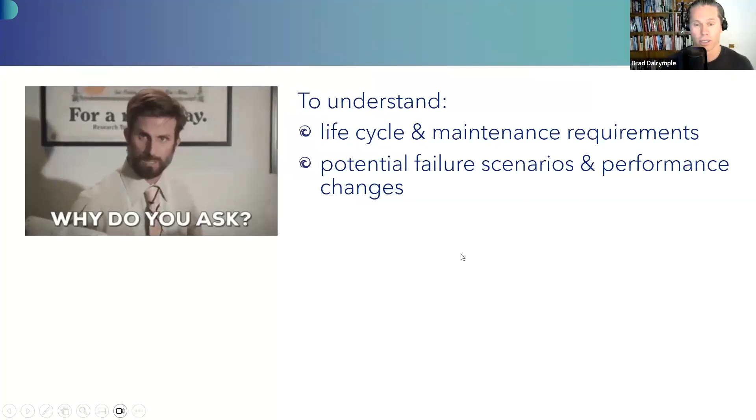Also, it's worthwhile noting that a huge amount of money is being spent on them. So like with any sort of expenditure, whether it's a car or a house or any sort of infrastructure, you really want to know how long they last. And to give you an example, this is a statistic from Healthy Land and Water. Just in Queensland alone, they reckon around $3 billion worth of bioretention systems are going to be put in over a 30-year period. And that's $100 million a year just in bioretention systems.

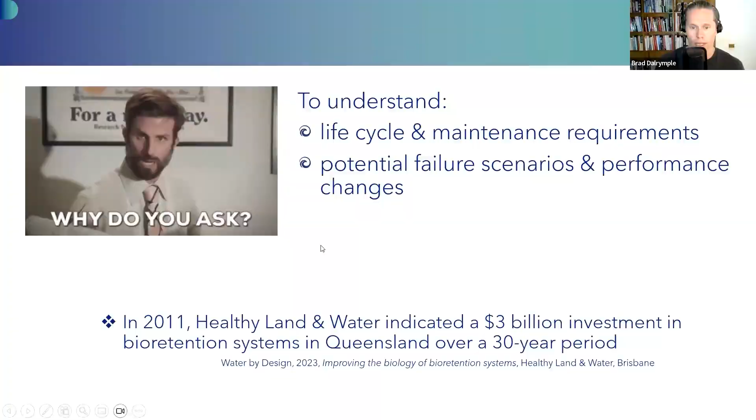So I think it's a pretty important question to know. And again, that's just in Queensland. I suspect it's more in Western Sydney and certainly in other parts of the country as well. So yeah, we're spending a lot of money on these assets. We should know how long they last. And like we often say, unless you've got data, you're just someone with an opinion. But a lot of people have opinions in this matter, and a lot of those opinions aren't based on much.

So to give you an idea of opinions, I've obviously got the live poll happening, and I can see over 100 have already answered the question. Really interesting results. So if you haven't already done so, please complete that poll survey question.

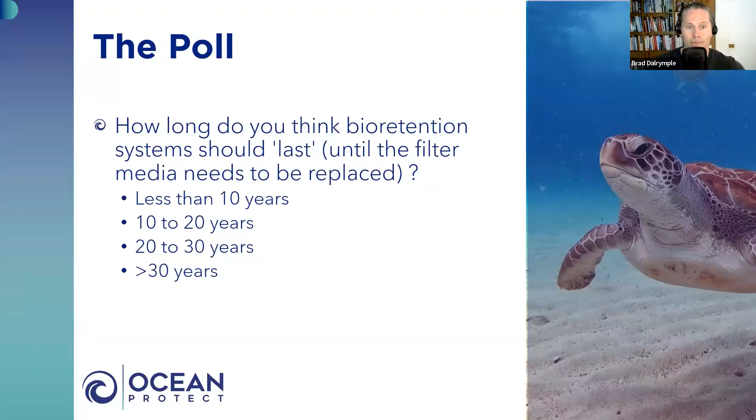We make sandy loam media for conventional bioretention systems as well. But also we make alternatives to bioretention systems. A lot of people would be familiar with our cartridge systems, for example. So long story short, I've got a conflict of interest on both sides of the fence. But to mitigate that, at least in part, anytime I refer to a study or a document in this talk, I'll provide the full reference.

Yeah, sorry, Brian's got a question. Thank you, Brian. He says the poll question says should. Does it mean how long we want the system to last or how long we think they currently last? It's how long you think they will last. So just to clarify, it's not a question of how long they should last, it's how long you think that they will last.

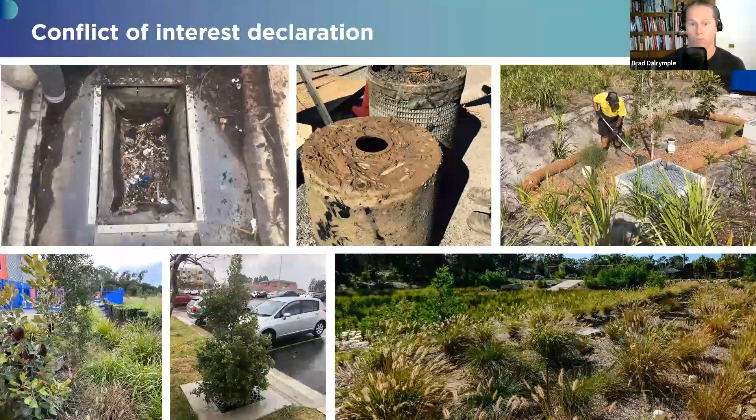So the question is, I'm just reading it now: how long do you think bioretention systems should last? As in, if it's appropriately put in the ground, for example. Okay. Hope that helps, Brian. Thanks for the questions. Keep them coming.

On that note, I'm going to share the poll results. So I'll give people 5 more seconds to put in your answer. I can see there's already 108 answers. Going once, going twice, going 3 times. I'm going to end the poll, and hopefully you guys can see the poll results. So I'm looking at the answers now.

I'm not sure what you can see, but out of 109 submissions, 34% have said less than 10 years. 37% have said between 10 to 20 years. So roughly 71% have said less than 20 years. 14% have said 20 to 30, and 16% have said over 30 years. So yeah, interesting results so far.

So I'll let you guys digest that for a sec. So 34% have said less than 10 years, 37 between 10 to 20. So like I said, 71% have said less than 20 years. And 29% have said more than 20 years. Interesting. I'm going to stop sharing now.

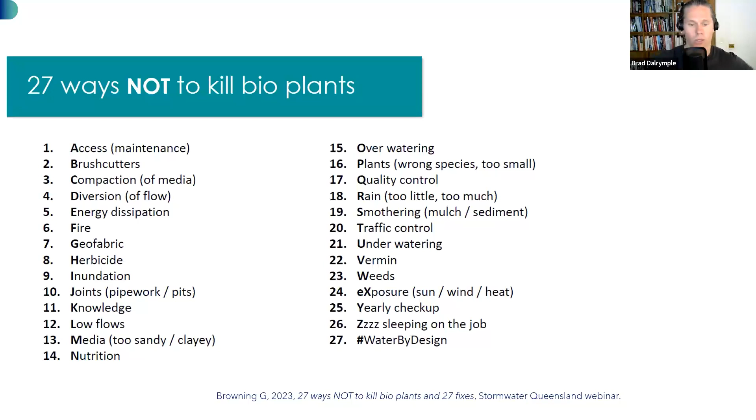But probably the two most common reasons that I see cited in guidelines or other documents are these two key reasons for failure. Number one, hydraulic conductivity, i.e. the system just doesn't drain very well at all. You get a whole bunch of ponding water, water doesn't drain through the filter media, so subsequently a whole bunch of water bypasses and doesn't get appropriate treatment.

The second reason commonly cited, probably the more common one, is that after a while the system just stops removing pollution very well. Basically the system is like a sponge. After a while that sponge reaches its capacity for absorbing pollution and physically can't remove any more. So they're probably the two most common reasons that I see claimed, and the two main ones I'm going to focus on in my review.

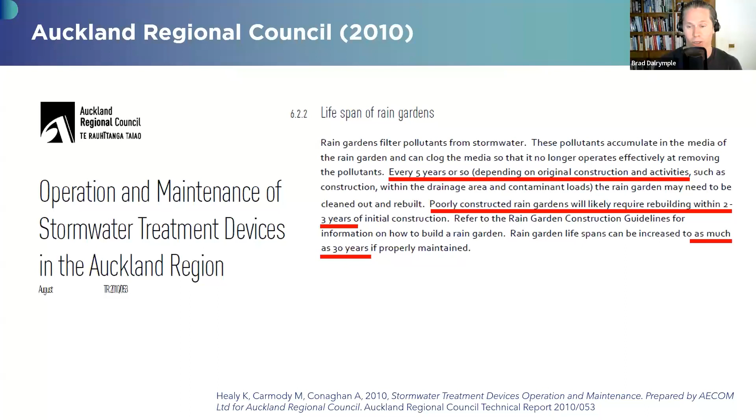Let's move on to what would be considered in many parts of the industry the Bible of water-sensitive urban design, how to model stuff in MUSIC. This is the eWater MUSIC manual, and they say basically every 25 years you probably need to replace the filter media.

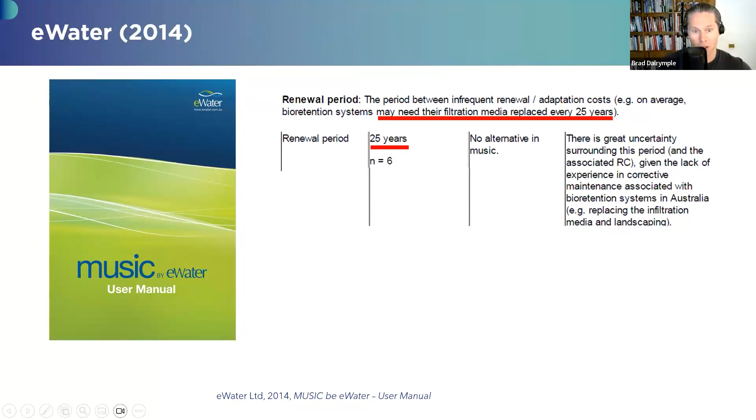But then they also say there is great, great uncertainty surrounding this period. That is true. But moving on, Melbourne Water. This is a leading authority in Victoria. They reckon, provided it is appropriately maintained, they should last at least 20 years.

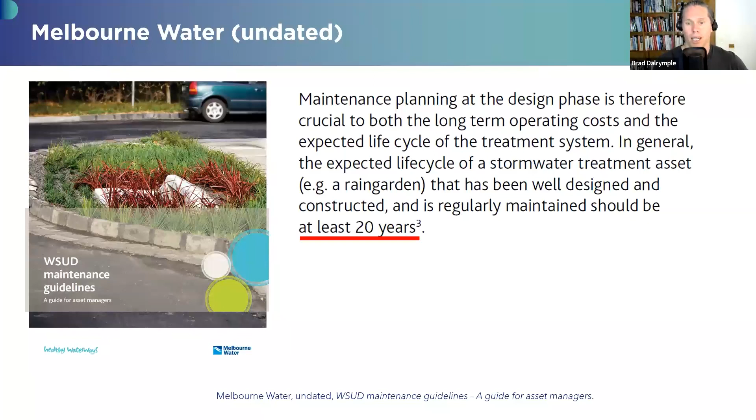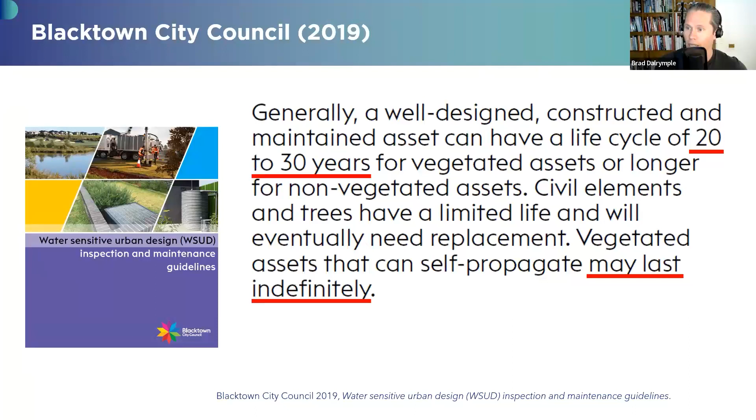If I go to Blacktown City Council, I know there's a fair few Blacktown City Council staff dialing in today. This is straight out of their inspection and maintenance guidelines for WSUD assets. They say, and they're talking about vegetated assets, but that obviously applies to bioretention, it could last around 20 to 30 years if it's properly managed, but also could potentially last indefinitely, similar to what Tom was saying before.

This is another paper out of the States. This is in relation to Filterra bioretention systems, which is a high-flow bioretention system, which I'll talk to in a sec. But they basically say, similar to Tom's claim, provided appropriate maintenance is performed, the systems should theoretically last indefinitely. And again, you can see I'm providing full references for these documents at the bottom of each of these pages as well. And the slides will be available on the website, so you can do your own research as well after today.

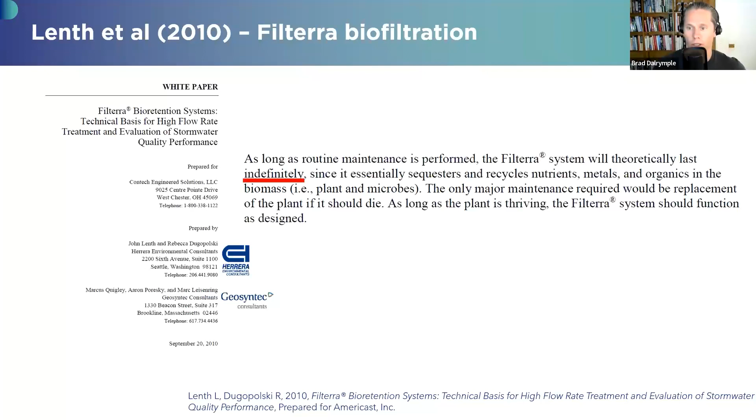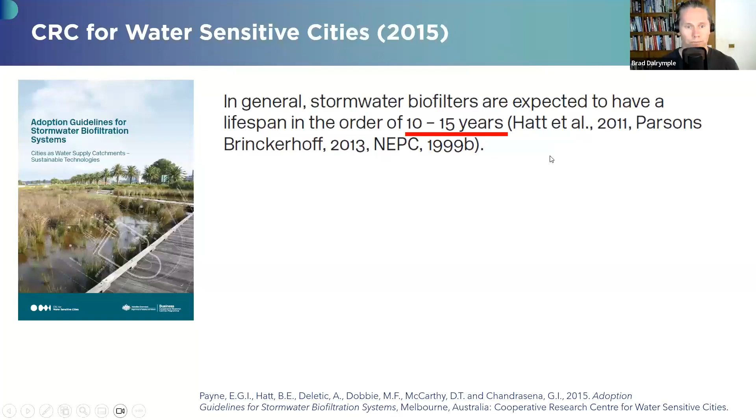Probably a really key document that is widely used across Australia is the CRC for Water Sensitive Cities adoption guidelines for stormwater biofiltration systems. They say, in general, bioretention systems should be expected to last about 10 to 15 years. Now, one thing that I will give credit to here is that they at least provide a reference. This is a Belinda Hatt study from 2011, amongst other documents, and I'm going to refer to that very shortly as well. So key documents basically saying 10 to 15 years.

Most of the studies that we have seen in the literature are basically using column studies, like laboratory-based studies, or focusing performance testing on quite recently constructed bioretention systems, like less than 3 years old. So it's a real unknown as to whether that's actually appropriate in terms of assessing bioretention longevity. But despite this claim, I took it on board and tried to dig up as much research as I possibly could. And that basically sent me in all different directions, including lab studies and real-world studies across the planet.

So first up, I mentioned that Belinda Hatt study before from 2011. And this is what the CRC for Water Sensitive Cities guidelines refers to in relation to that general statement that they should last 10 to 15 years. That is based on this study. And the study is available online. They did show quick breakthrough of zinc, which is a heavy metal that's quite hard to absorb, at least long term, because it's probably one of the first heavy metals to break through, i.e., go through the system.

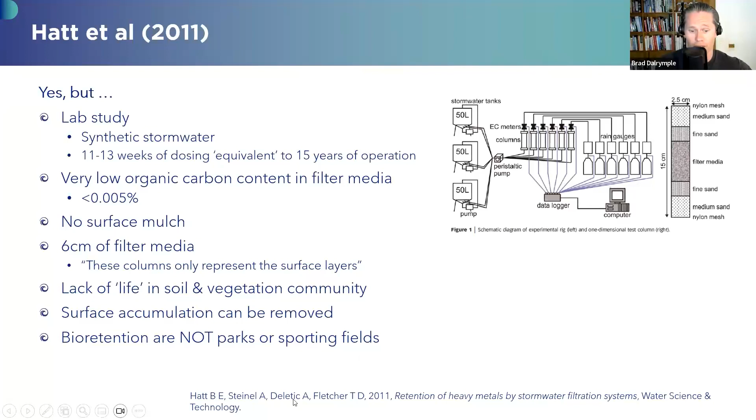I'm going to look at a few other lab studies, recognizing their limitations. This is a study out of the Canadian Journal of Civil Engineering. They looked at synthetic stormwater as well, equivalent to 20 years operation, 8 columns, decent depth and vegetation. And what they showed was that effluent concentrations of pollutants actually decreased across the monitoring period. So basically, as the systems got older, the effluent concentrations decreased over time, which means the system is working better as it ages.

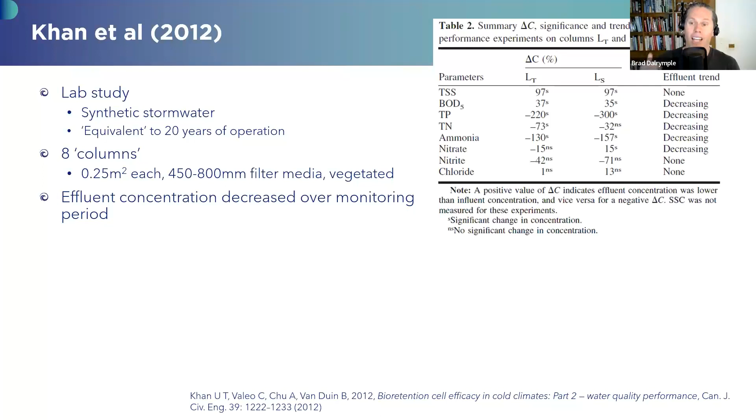Having said that, this study is very upfront in stating that there's a big limitation to this study or any lab study, and they say it here: the application of a large volume of runoff over a relatively short period of time does not mimic actual long-term operation, especially the intermittent nature of rainfall events. It can be considered a worst-case scenario. So they're saying that this sort of study, synthetic stormwater dosing over a very short period of time, as per the Hatt study, is basically a worst-case scenario.

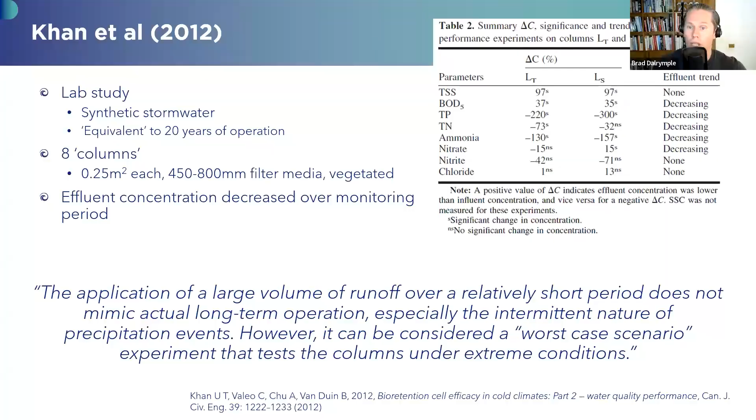So it's worthwhile noting that these lab studies have very limited use. They're interesting and can provide some indication of lifespan, but you really need to look at where the rubber hits the road in terms of real world performance studies. And that's what I'm going to talk about now.

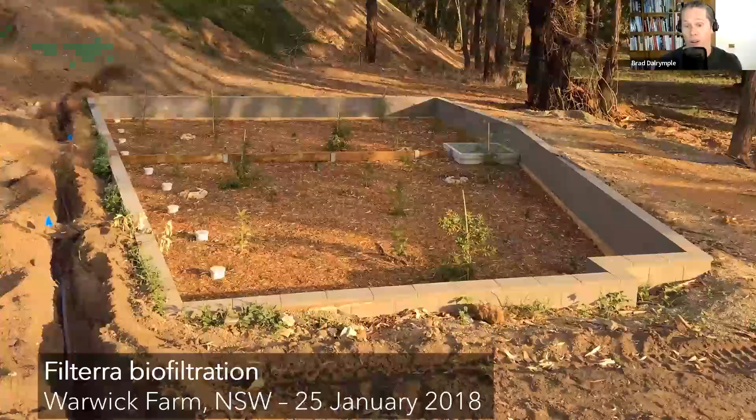Equally, there's a whole bunch of Filterra bioretention systems in Australia. For example, this is the first one built in Western Sydney in January 2018, so 5 years ago. That's what it looked like day one. This is what it looks like basically now, 5 years later.

Equally, there's a second system out at Warwick Farm in Western Sydney. This is it day one after it was first planted out. You can see the vegetation, very small trees. There's diversity of vegetation, but generally fairly small plants. That was a photo 5 years ago, and this is what it looks like now.

But look, I'm sure you guys have seen your own share of poorly looking bioretention systems. Not that any of you guys have designed ones that aren't functioning very well. I'm sure we're all wonderful bioretention designers.

But obviously there's a whole bunch of bad examples. Some more data. This is a study that was done a few years ago. The data on the left is from Moreton Bay Regional Council, provided by Jonathan Whitcomb, who was the asset manager at the time for WSUD systems.

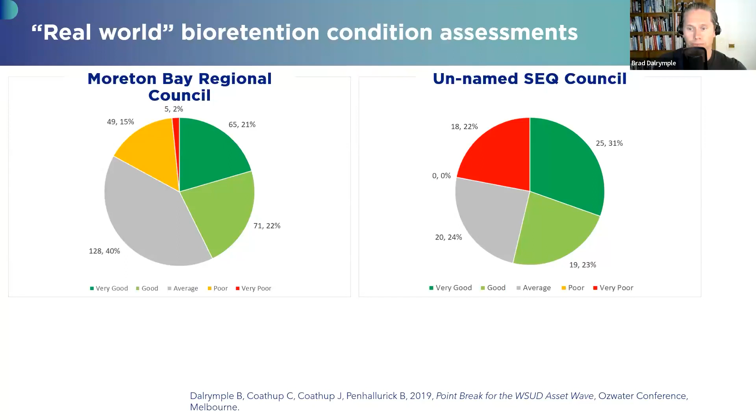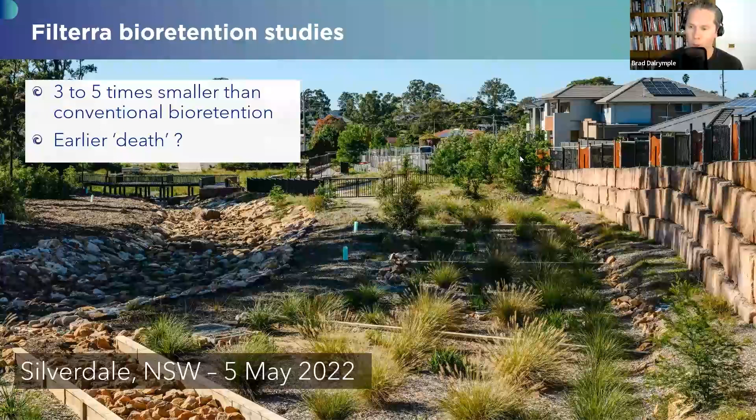But subsequently, the hydraulic loading rate is obviously a lot higher. So if that's the case, and if bioretention systems did have a limited lifespan, surely you would see an earlier death in Filterra bioretention systems in particular. But do we see that? Let me show you. This is a study recently released by Contech in the States. They looked at 3 Filterra bioretention systems that have been in the ground for several years.

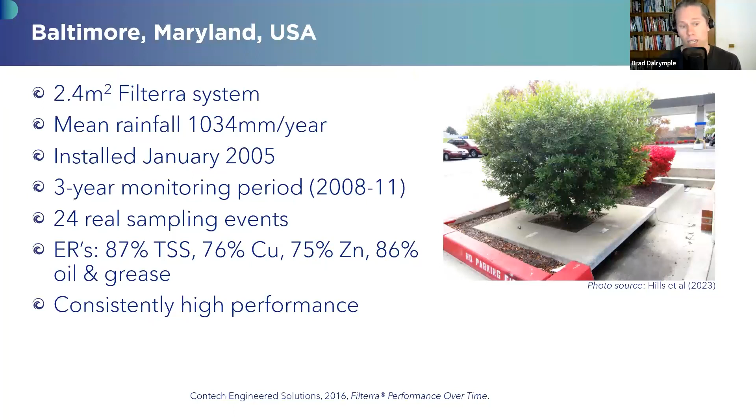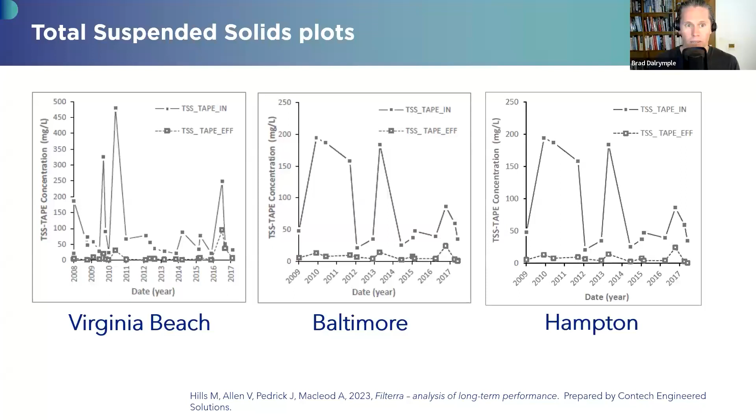This is the second one out of Maryland, Baltimore, installed in 2005, 3-year monitoring period, 24 events, all high removals of TSS and heavy metals, etc. Equally at Virginia, again, installed in 2005, up to 11 years old by the time they finished the 8-year monitoring period. No decline in performance, really high rates of TSS and heavy metal removal. And look, if you're a nerd like me, you can look at all the data in a lot more detail. Again, it's readily available in the documentation. But long story short, we're seeing no decline in performance.

Effluent concentrations, if you thought it was hitting its absorptive capacity, you would probably see an increase in the effluent concentration, for example. But we're not seeing that at all. We're seeing really consistent stormwater treatment performance over several years of operation.

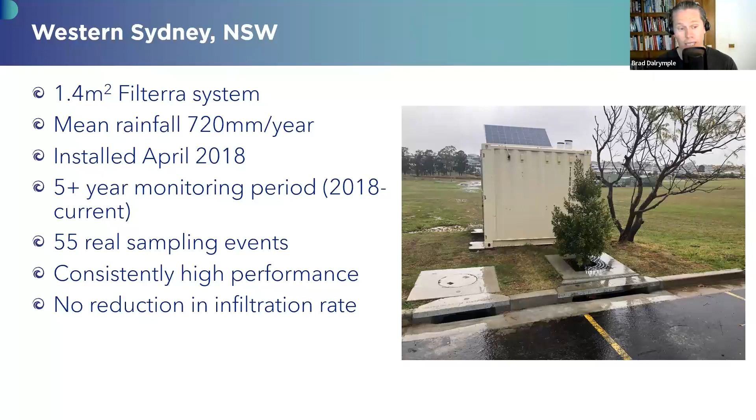Western Sydney. So this is a study that I referred to a few times in previous Ocean Protect webinars. There's a published paper on it, etc. This is a system that is a Filterra bioretention system. The cabinet behind it is basically a house for a whole bunch of very fancy monitoring equipment to take influent and effluent samples, measure rainfall, measure flow, a whole bunch of stuff. It's been in the ground since April 2018. We've now been monitoring it for 5 years, and we've got 55 qualifying events. So there's a lot of data. Long story short, no reduction in performance, no reduction in infiltration rate, etc.

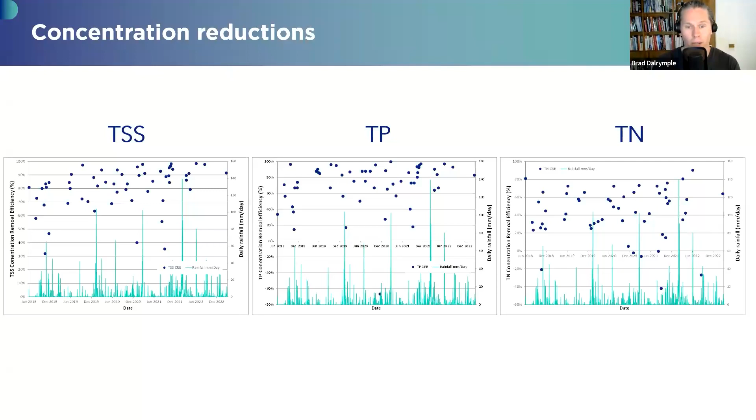And now I do have a lot of data on this, and it's hard to show it, but I'm going to try and do my best to show that data now. So if I look at the establishment period. So this is the first 12 months of the system after it was installed. So this is when the system's basically quite young. It's not necessarily handed over to the asset owner or whatever, just like a typical establishment period for a bioretention system. There was 10 events monitored.

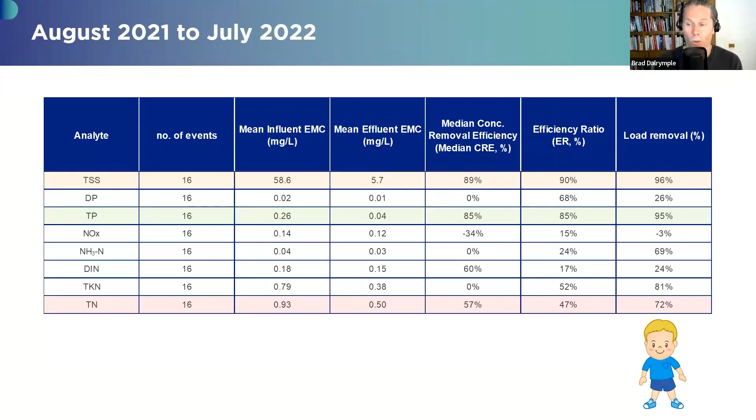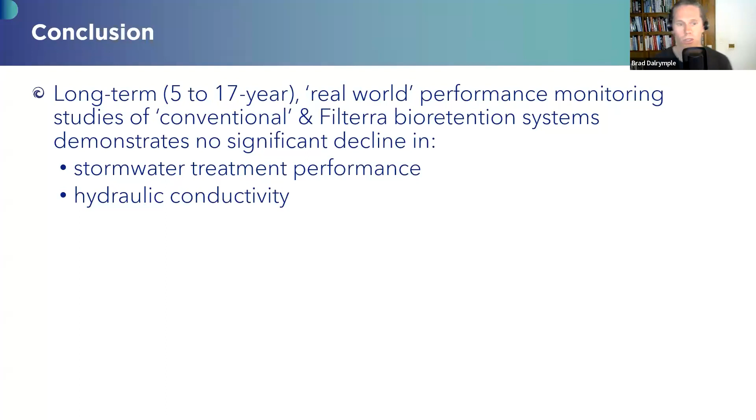So in conclusion, the long-term data is pretty self-explanatory. The long-term real-world performance monitoring data of both conventional systems and Filterra bioretention systems demonstrate no significant decline in stormwater treatment performance or any significant decline in hydraulic conductivity. So I'm going to agree with Tom here, and I think it was about 10% of the attendees.

If designed and installed, established and maintained correctly, the bioretention media and vegetation environment is likely to provide a sustained stormwater treatment function indefinitely. Now, I recognize that's a big if. So if it's designed, installed, and managed properly, these systems should last indefinitely and perform really well indefinitely. But again, that is a big if. And I'm going to come back to that in a sec.

There are a couple of key unknowns. Number one, obviously bioretention systems are more than the filter media and vegetation. There are other components. I don't know how long they're going to last. You'd expect them to last a very, very long time, particularly if they're underground, I would have thought, not exposed to the elements or at least sunlight. But I'm not sure. I'm not sure if that's ever really been assessed.

The other key unknown from my perspective is the impact to bioretention ecology. Now, I wouldn't have ever really thought about this as a key issue 6 months ago, but there was a study by the CSIRO team and a bunch of guys out at the university, I think WA. They looked at stormwater wetlands in Perth, and they looked at the tiger snake populations, and they basically showed that PFAS and heavy metal contamination in the wetlands was causing the snakes ill health. So their ability to function, their body condition, etc., was impaired by pollution accumulation, particularly in relation to PFAS and heavy metals.

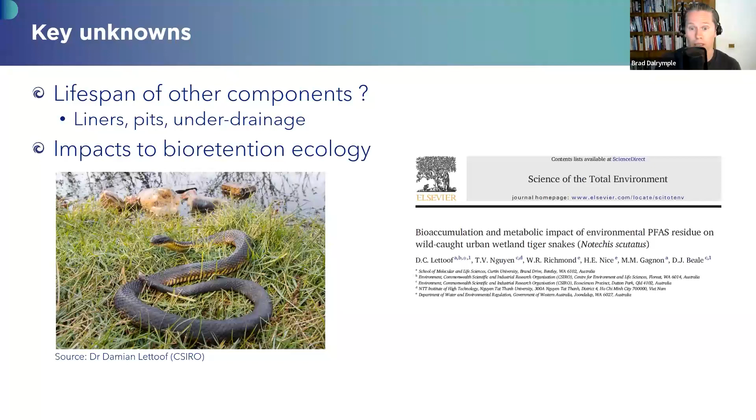Now, snakes are obviously an apex predator, but there are probably a whole bunch of other species that could be equally or worse impacted by pollution accumulation in the wetland environment. Now, it's a long bow, but maybe that might be an issue for bioretention systems as well, and the ecology that is attracted to these systems. Not sure. Something worthwhile investigating, certainly beyond my abilities, but hopefully there's a PhD student out there looking for something to study.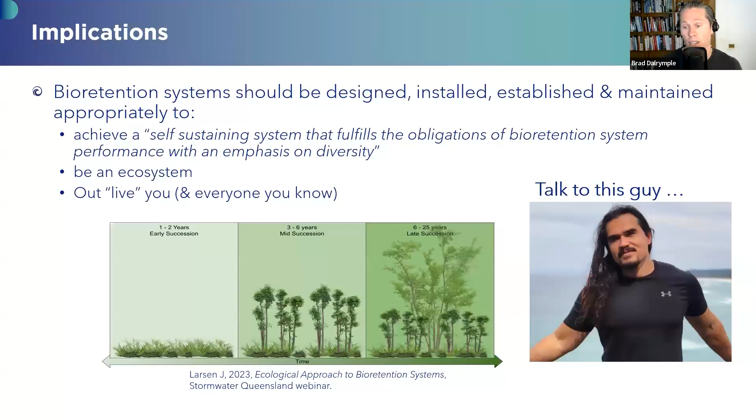What are the implications for asset managers, though? If bioretention systems are lasting indefinitely, how should asset managers appropriately manage them? The key recommendation is asset managers should not be planning to replace these systems just because of some perceived deterioration in stormwater performance. But having said that, they need to be appropriately maintained. A key maintenance intervention in particular is to make sure that accumulated solids are removed. These systems are still going to capture and retain pollution. Now, there's a couple of ways of removing those solids. Ideally, from my perspective, you mulch the surface and remove it and replenish it, or you scrape the filter media surface and remove that.

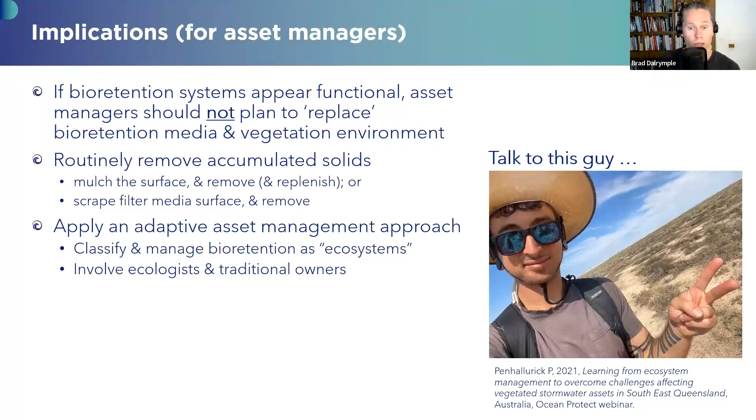Long story short, you apply an adaptive asset management approach. And Ben Penhallurick can talk about adaptive asset management till the cows come home, literally. So if you're keen to know more about that, please talk to Ben. But long story short, consistently with what Jonas was saying, they should be managed as ecosystems, and if you're doing that, you should be involving ecologists and traditional owners as well.

What about designers? Now, I recognize I've got mainly designers on the webinar today. What should you do if you're a designer? First up, involve an ecologist. Secondly, aim to deliver ecosystem functions and services, and maybe consider the lifespan of other components. Maybe look to reduce your reliance on other components. Maybe, I don't know. But from my perspective, the key thing that designers should be doing is maximizing resilience. So there's a whole bunch of things you should be doing to do that.

Reduce incoming pollutant loads. I think it's a mistake that we think that these bioretention systems can just take whatever pollution comes off an untreated catchment. Ideally, reduce pollution at the source or provide some sort of pre-treatment. Obviously, there's a conflict of interest here. Ocean Protect does gross pollutant traps, but I think that's a key step to maximizing resilience. Secondly, ensure appropriate hydraulic design, making sure that flows are appropriately distributed, not just a single inlet.

Eliminate base flows, but also make sure the system is offline, so you're not going to get a whole bunch of erosion and scour coming through the system because of high velocity flows. Thirdly, ensure the filter media is appropriately consistent with the specification. Now, at Ocean Protect, when we make Filterra media, for example, it's a very detailed procedure. It's a 25-step QA/QC. I don't see anything like that happening in the manufacturers of sandy loam media. But regardless, you need to make sure that filter media is appropriate.

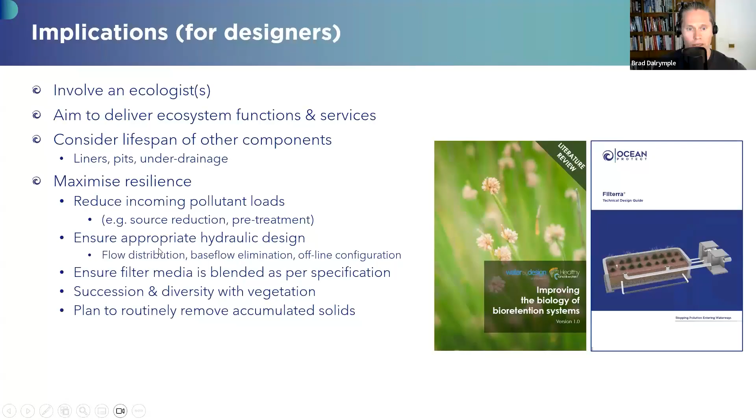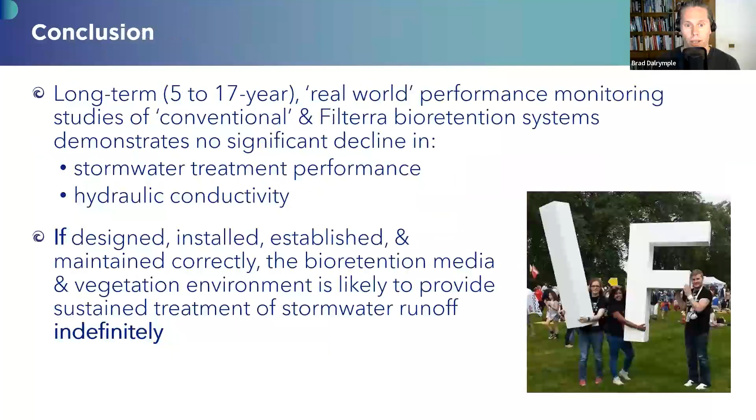Did we need to replace the whole thing? No, we just scraped the mud away and scraped the mulch away. We did hydraulic conductivity testing of the filter media. It was still draining really well. Again, provided the system has appropriate resilience, particularly the application of mulch to help provide a screen for sediments and muds that can deposit in a flood event, you might not necessarily need to replace the whole system. Thanks for the question, Zul.

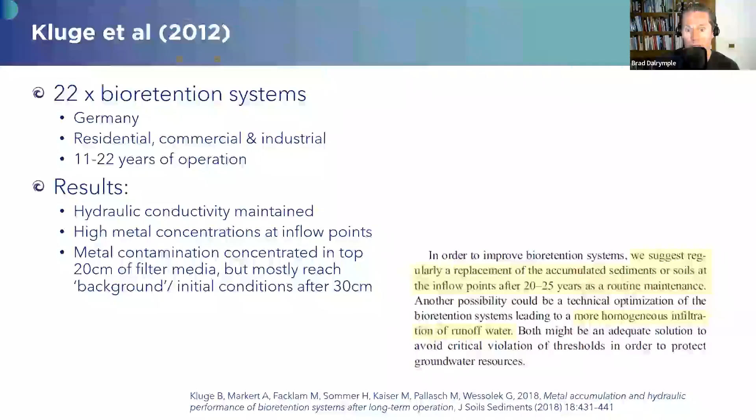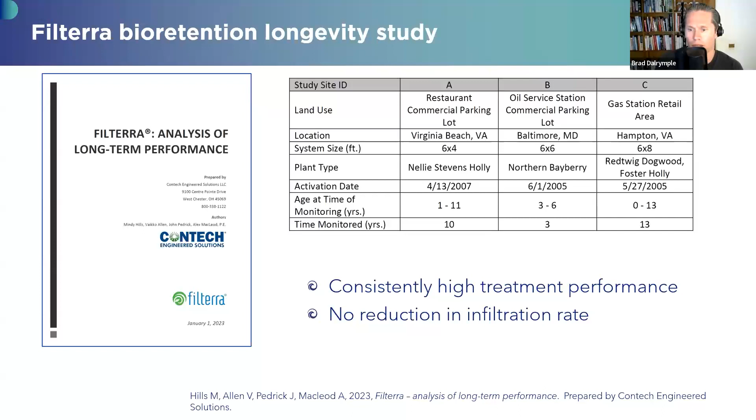Che McKenzie asks, what is the maintenance regime for the Filterra studies? Yeah, good question. The Filterra studies I referred to before, this is, I guess, the Contech paper here. I think it was pretty basic maintenance, it's certainly not gold plated. And I think one or two of them got very, very little maintenance. So there certainly wasn't anything out of the ordinary. The key thing we recommend in terms of the maintenance of Filterra is just to replace the mulch, probably the main one, every 1 or 2 years.

Now, as per the Warwick Farm system I showed before, that certainly hasn't happened more than maybe once or twice in 5 years, but it's still maintaining its longevity. I'd probably expect the same thing for these studies. But again, the maintenance regime will actually be described here, but I don't think it's anything out of the ordinary.

Courtney Henderson from AECOM says, great to see all this data. My PhD research indicated that microbial activity in the rhizosphere appeared to refresh the adsorptive capacity of the media for phosphate and ammonia. Yes, thank you, Courtney. I do remember your PhD. So yeah, I think this data that I'm showing here certainly supports or is consistent with your PhD research. I must admit I didn't actually find your PhD in the studies I did, Courtney. So if you can send me the link, I'd be more than happy to review it, recognizing it was quite a few years ago now, not that long ago though.

Another question from Courtney. Courtney says, presumably the microbes cleave off the nutrients, freeing up the adsorptive capacity of the filter media. Therefore, it was concluded that maintaining the health of the rhizospheres was important. Yeah, possible. I think that's probably a factor, Courtney. So yeah. Thanks for that.

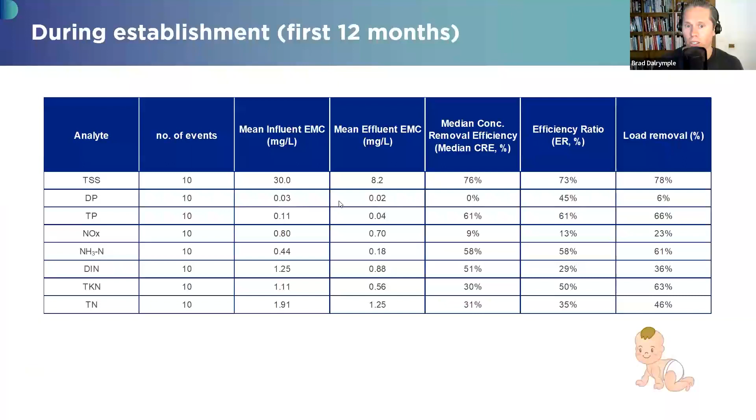Sorry, I spoke too soon. There's questions coming in already. Ben Penhallurick. Yeah, good point, Ben. Ben says there are bioretention systems over 20 years old that are still performing well with little to no maintenance. They all have trees and ground covers. I don't think there's many, Ben, that are over 20 years old that are still performing well. Certainly the Hoyland Street one is 22 years old. That's the second oldest bioretention system in Australia. And like you said, that seems to be working, or at least visually functioning very well.

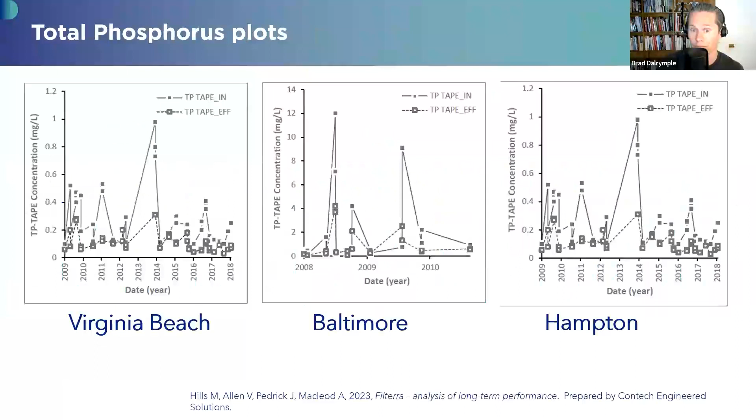I'm just going to try and show you a picture of what I mean. So to give you an example, this is the Hoyland Street bioretention system at Bracken Ridge. You're welcome to go out and check this one out yourself if you like. It's readily available to the public. And this is 22 years old. This is the second oldest system in Australia. This has got very little maintenance, to the best of my knowledge. I know Brisbane City Council have done a few studies on it, looking at hydraulic conductivity and performance. And to the best of my knowledge, the data shows that there's no deterioration in performance.

So I think, Ben, your commentary around diversity of vegetation is important. Yeah, the systems with tree coverage and ground covers are going to be more resilient. And certainly the ones I've shown or looked at have those attributes. I hope that helps, Ben. Feel free to chime in for more commentary as well.

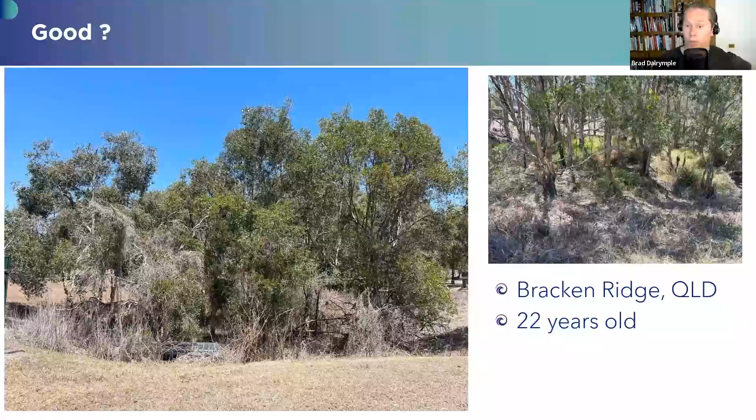Abishka Johar, sorry, I probably mispronounced your name. They ask, do droughts affect the bioretention systems? It's a great question. Yes, obviously any vegetation needs water, but it certainly depends on a whole bunch of other aspects as well, particularly the ability of the system to retain water.

For Filtera systems, we use a 75mm depth of double shredded hardwood mulch, which acts to help protect the filter media, but also helps retain water within the filter media. But also, we do prefer to put in species that can handle extended dry periods as well. And they're basically the same plants that you would probably see in a recommended list of standard conventional bioretention systems as well.

Ben Penhallurick says, oh yeah, Wakeley bioretention system. Yeah, I'm not sure how old that one is. That might be nearly 20 years.